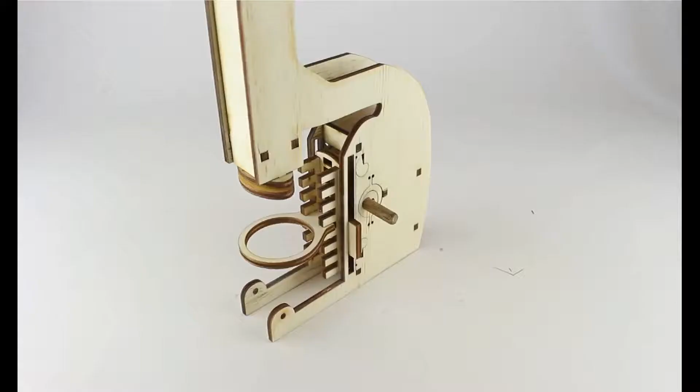Our software tool KerfCanceler allows modifying cutting plans so that they not only work when fabricated on the laser cutter they were designed for, but also on other machines that remove much more or much less material.

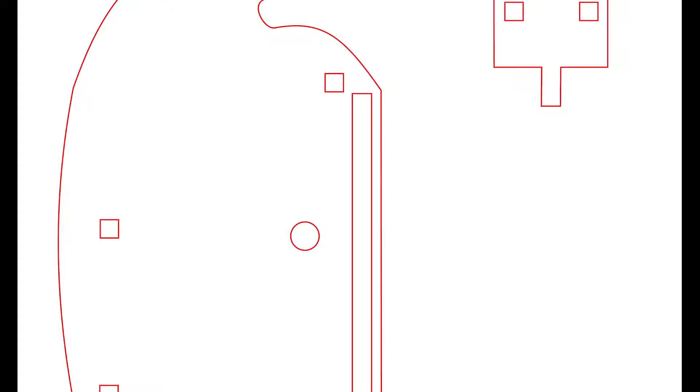Today, laser cut models are shared in the form of 2D cutting plans. As the result of sharing, however, users may fabricate on machines that remove more or less material, which is also known as kerf. The embedded mechanisms therefore come out too wide or too narrow, which causes them to jam or slack.

In this paper, we make mechanisms work reliably by compensating the amount of material removed by laser cutting them. This bearing operates reliably, the slider does not wiggle, and the gear that performs the height adjustment engages perfectly with its counterpart, all independent of the amount of material removed by the cutter.

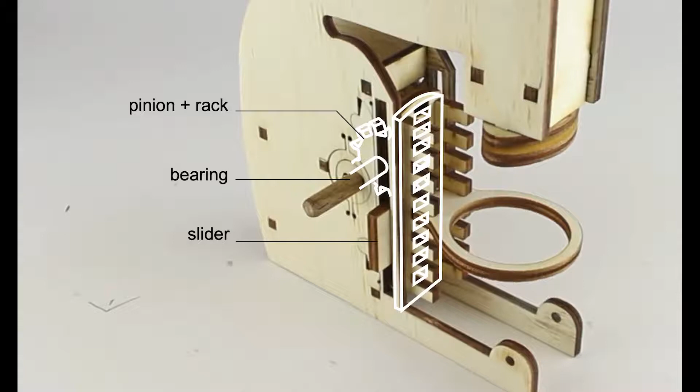We achieve this by something we call kerf-canceling mechanisms. Mechanisms that continue to perform their functionality independent of the amount of material removed by the fabrication machine. We built a software tool KerfCanceler that allows users to modify cutting plans with these kerf-canceling mechanisms.

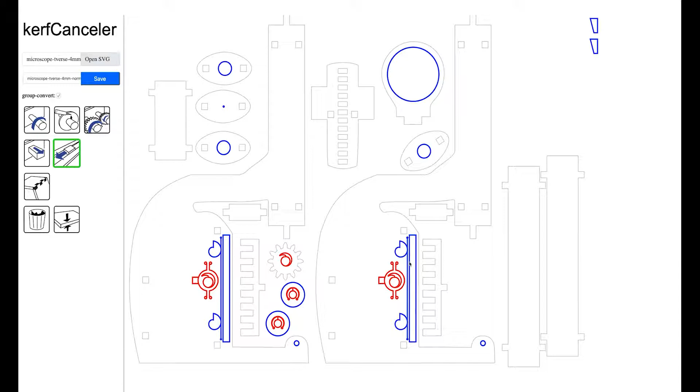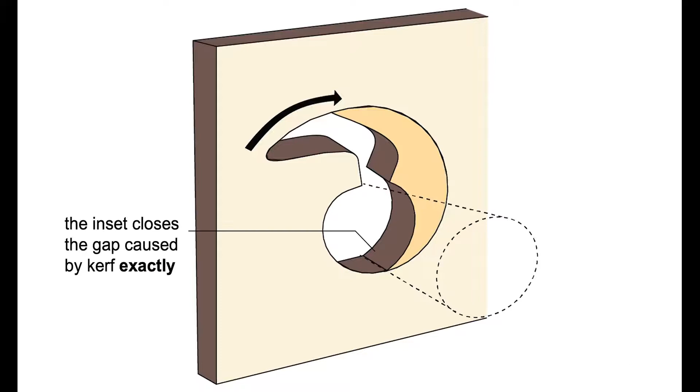Let me explain how kerf-canceling mechanisms work at the example of the bearing. This bearing holds an axle in place, even when we increase the amount of kerf. The inset closes the gap caused by kerf exactly, and all users need to do is to jam the inset in place, so there's no need for tuning.

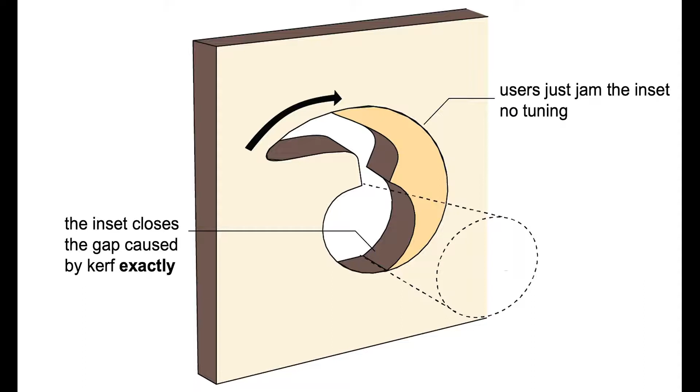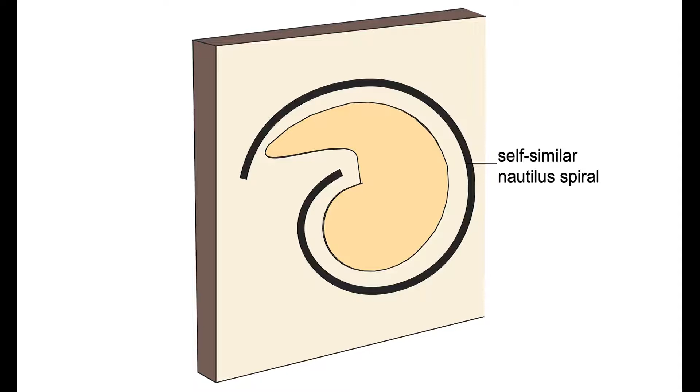The mechanism we added to this bearing thus cancels out the kerf produced by the laser cutter. Let's see how it does that. So the kerf-canceling bearing consists of two design elements, the jammer and the inverse scaler. The shape of the jammer is derived from a Nautilus spiral. We place an inset of the same shape inside the cutout.

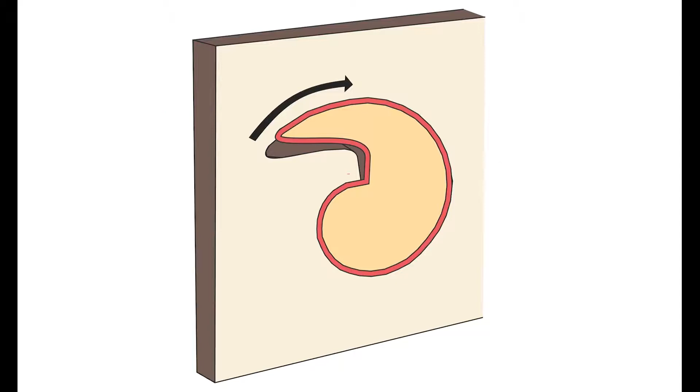On a machine that removes more material, the inset comes out too small and would just fall out of the plate. However, the self-similarity allows me to lock the inset in place by rotating the inset. So the shape of the jammer holds the inset in place. In turn, the inverse scaler holds the axle in place.

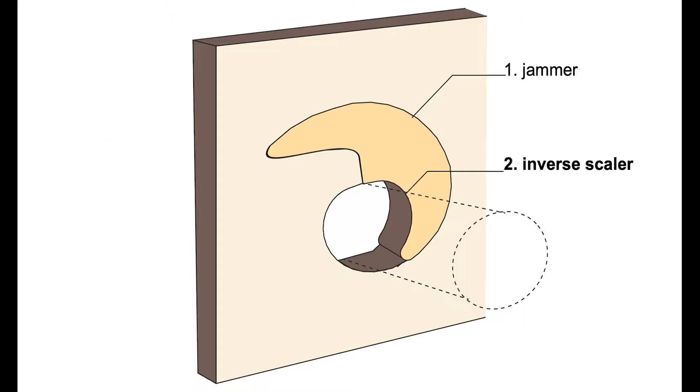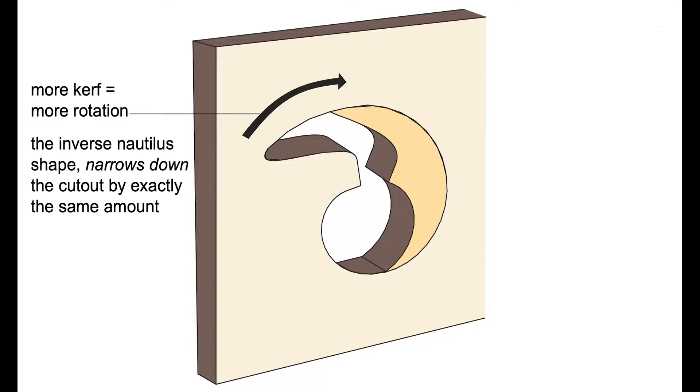This works because the shape of the inverse scaler is a flipped version of the jammer. More kerf results in more rotation. The inverse Nautilus shape narrows down the cutout by exactly the same amount, resulting in bearings that reliably cancel out any kerf, as shown here with increasing amounts of simulated kerf.

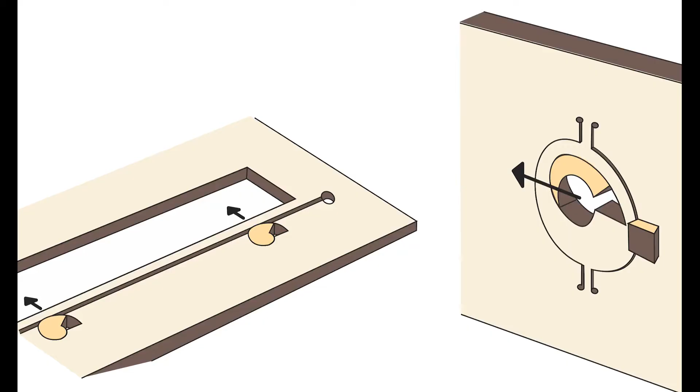In the microscope we started out with, there was not just a bearing, but also a sliding mechanism and a gear to control the height adjustment. For these we also have kerf-canceling equivalents. The kerf-canceling equivalents of these leverage simple wedges to linearly reduce the increased size of the cutouts. And these mechanisms combined allow me to make this microscope completely independent of the amount of material that is removed.

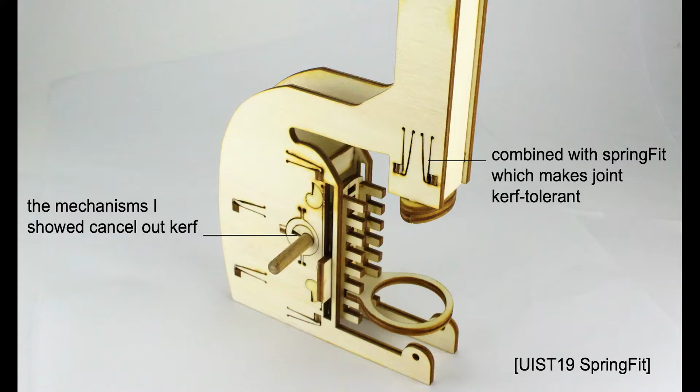So in conclusion, the mechanisms I just showed you cancel out kerf. In combination with springFit, which makes joints kerf tolerant, this allows me to fabricate this microscope on any laser cutter. I see this as a step towards my bigger goal of portability. Having laser cut models function reliably, independent of the specific laser cutter, material, or material thickness that was used.

Portability in the context of computer science made source code valuable, as the resulting code could be shared and used by others. It was a prerequisite for more advanced collaborations, such as remixing and modifying code written by others. I think that by achieving this in the context of laser cutting, we could, just like in computer science, stand on the shoulders of giants and truly increase the complexity of what we as a community are able to produce.